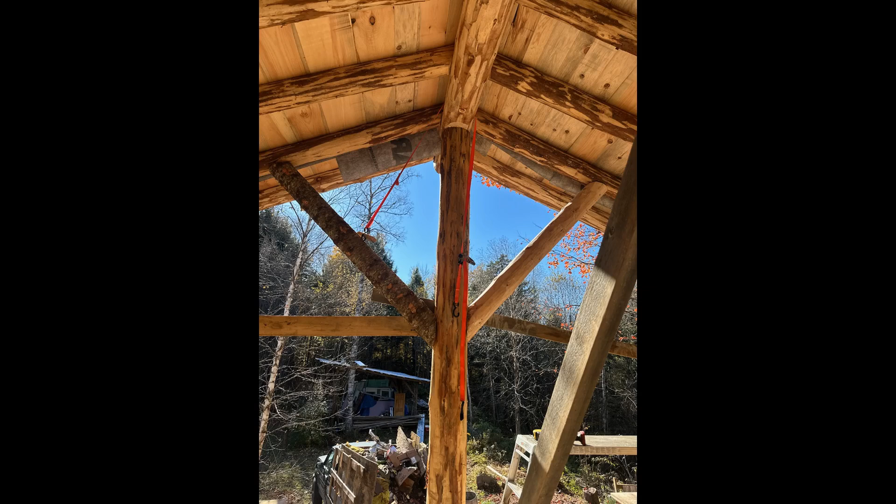This video is going to be about the hows and whys of Ford's cabin. The design, why we built it the way we built it, how we put the pieces together. Let's start with the design.

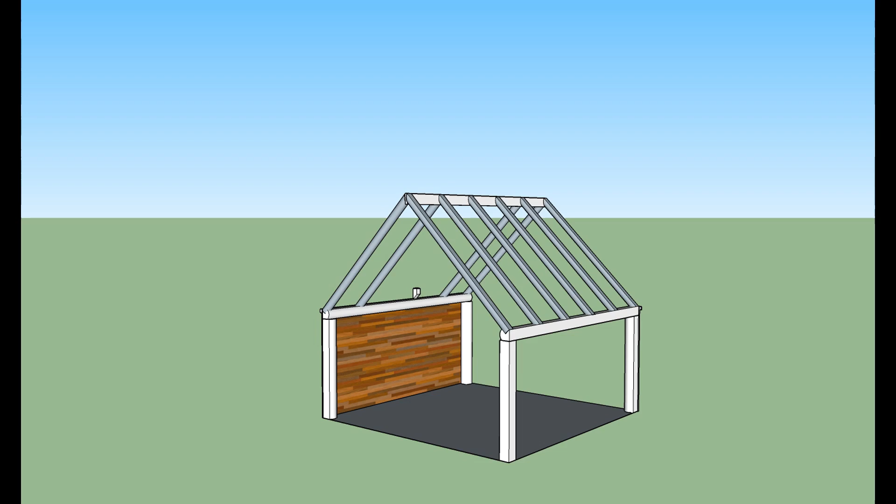The design was entirely Ford's. I suggested a bunch of more alternative, shall we say, hippie designs for him. Little portable cabins, things that combined like a workspace with a living space above it, stuff like that. And he wasn't having any of it. He knew what he wanted, and eventually he got it down on paper clear enough so that I could help him figure out how to actually build it.

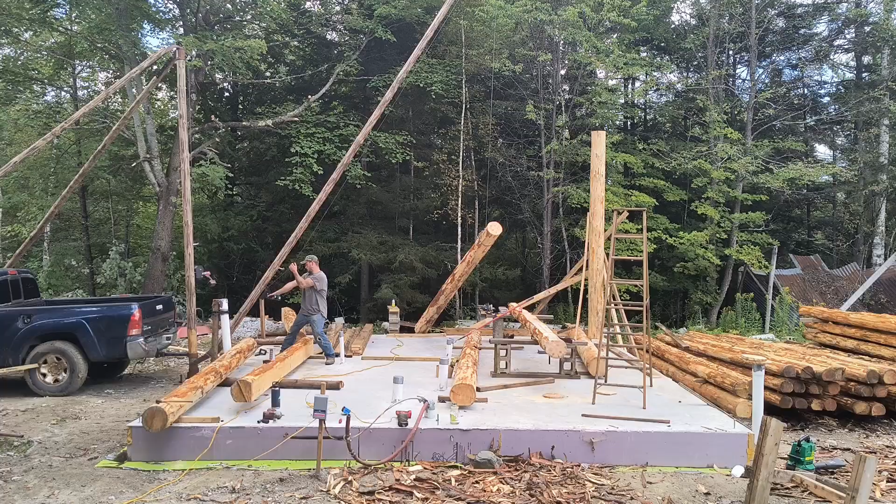So what he came up with, 20 by 24, kind of a story and a half, knee walls on the upstairs, and a structural ridge. And then I just figured out how to put that into an actual building. We were somewhat limited just by the sawmill.

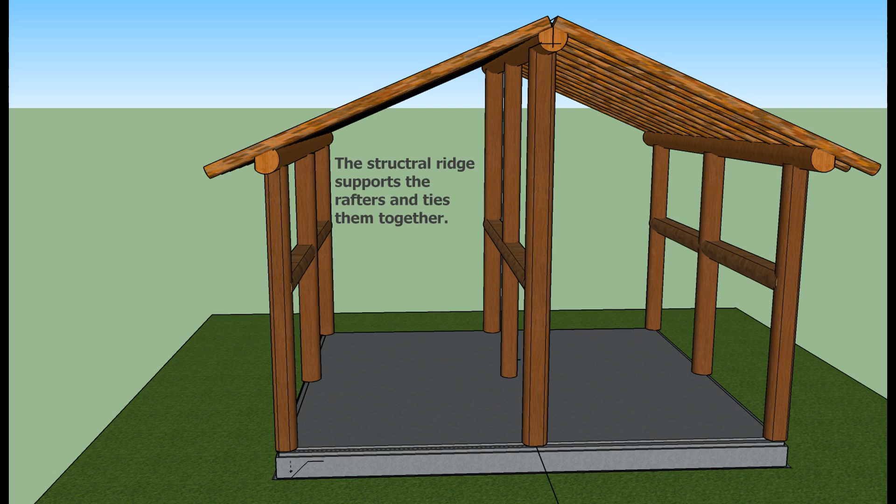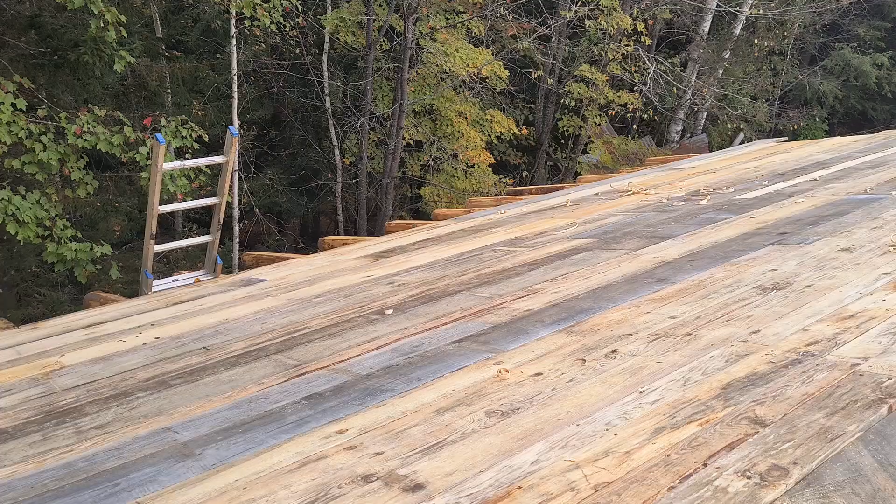When I realized he wanted knee walls and a ridge, so we'd have to have a structural ridge to carry the rafter load, and the sawmill can only cut 18 feet, so that kind of limited our ridge height there to 18 feet. So then we went down on the sidewalls to 13 feet, which gave us a 6/12 roof pitch, which is fine in this climate. A little flat maybe, but fine, and certainly a nice roof to walk on and work on.

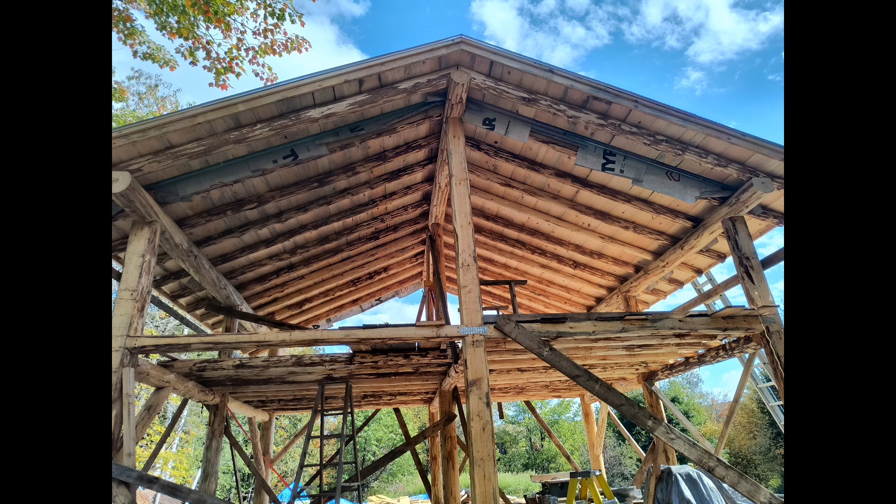And that gave him a knee wall upstairs of roughly 5 feet, which makes most of the upstairs pretty much completely usable. Actually, you can walk almost right to the eave in the upstairs. It's a very spacious feeling up there, and 10 feet tall at the peak.

There was a pre-existing dilapidated, mold-filled double wide trailer on that site. The previous owners had bought a trailer and then done a pretty good job of turning it into a double wide. The part that wasn't the trailer, they'd had a sonotube foundation, just 8-inch sonotubes, about 2 feet in the ground. They'd done a pretty nice job of building and integrating that addition onto the trailer.

Those sonotubes, even though they were only 2 feet in the ground, they were all still straight, and that really goes to the quality of the soils there. Very sandy, very well drained, and I think that the material is just good enough for the water to drain away. The site is also kind of on a little mound, basically slopes away from the house site in all directions, which is kind of perfect.

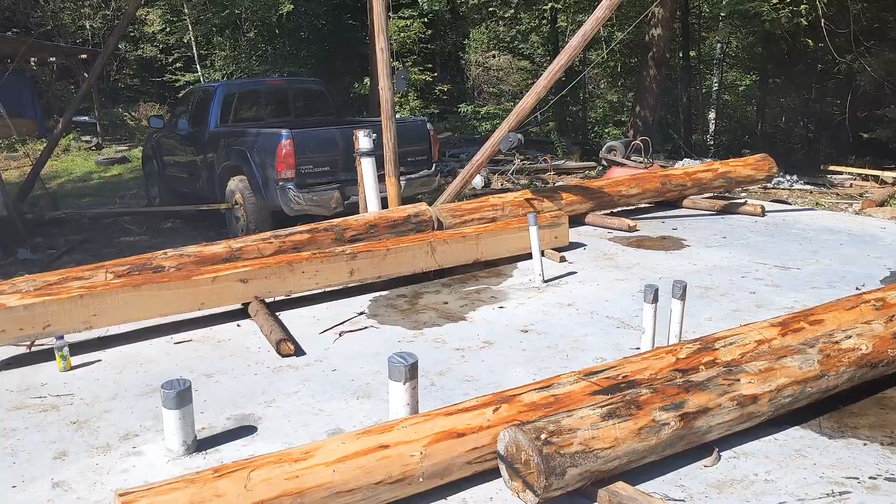So Ford's decision was that he wanted to put in a slab, put radiant heat in the slab, and build on that. And we started in that process, and went back and forth about how to do the slab. Eventually we calculated out the cost of just making a 12-inch thick slab all the way across versus the cost of making it 12 inches around the perimeter and thinning it down to maybe 6 in the middle. It was about an extra $1,000 of concrete, I think.

But when you figure that we would have had to spend $400 or $500, maybe even $600 on stone to fill in and raise up the middle of the slab, it just seemed to make sense to just do the whole thing in one thick chunk of concrete, which Ford put a ton of rebar into too, because he's a welder, and so he welded up a bunch of rebar cages. That slab's never going anywhere.

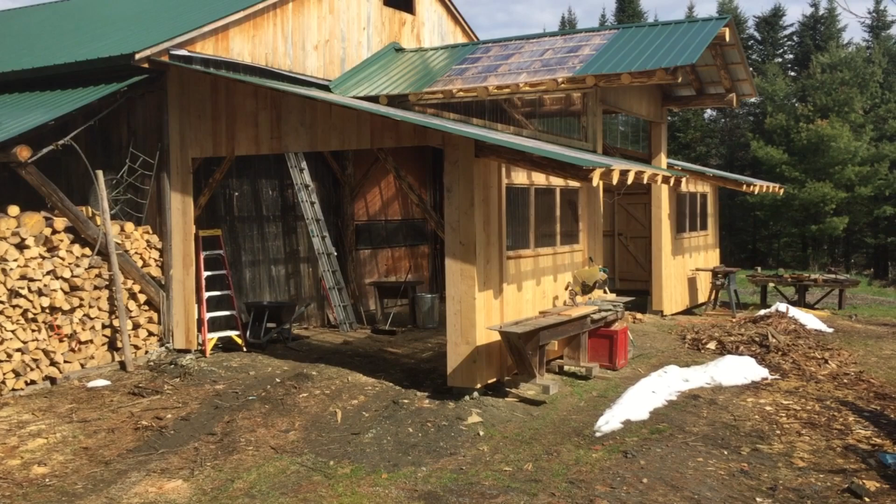The original motivation or inspiration for the way we built it, I think, came from the garage port, which is the structure we built on the back of our house 4 or 5 years ago. Ford and I did that. We framed that. We tried to do that cheaply and quickly, and we framed it out of logs. And it really looks nice inside.

When we built that structure, we hadn't gotten the sawmill working then. So we just used the logs straight up, round all the way around. Tried to use straight ones for the rafters. And the rafters on that building were 22 feet long. So quite long rafters with a nice long tail overhanging. And they're pretty straight, but you can see that the roof is anything but flat. It works, doesn't leak, and it was cheap and sort of quick.

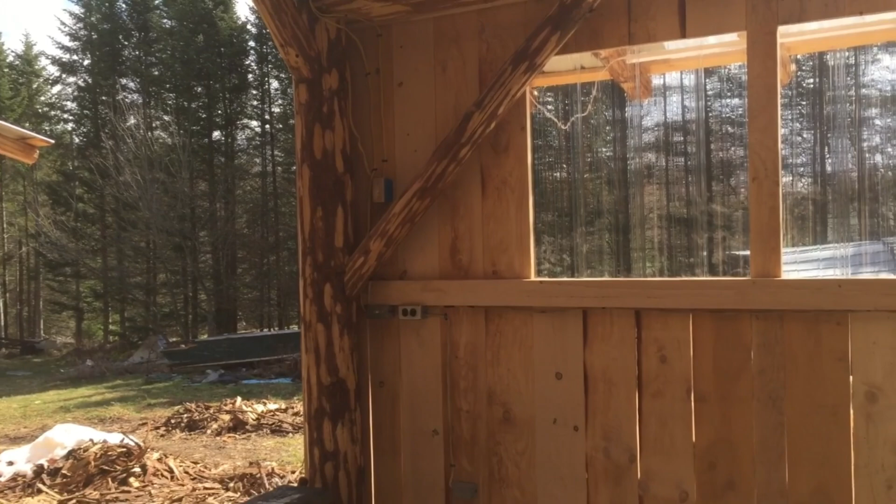But on this one, on Ford's cabin, because it was going to be a house and because we had gotten the sawmill operating, we decided to flatten one or two sides of each of the logs so we had a frame of reference, and also so we had a flat outside edge to work off of and to measure from. I was very impressed as we did that, running the mill down the one edge of the logs and taking off a little slab, and how little waste there was.

Previous to cutting up these logs for Ford's cabin, I'd cut up a small load of logs that had been laying around. And I'm not a great sawyer, and we're just learning to use that sawmill, but there's a lot of waste and a lot of slabs and just throw away. When we cut up the logs for Ford's cabin, we just took a thin little slab off of each side, very little waste, which meant that most of the logs we used were essentially cull logs. They were small trees, most of them barely big enough to make a couple 2x4s, maybe a 2x6 out of.

And I got to believe there's also some structural advantage to using wood in log form where the rings of the tree are all concentric, the way they grew, rather than laying in the wood however they are when you cut them into a piece of dimension lumber.

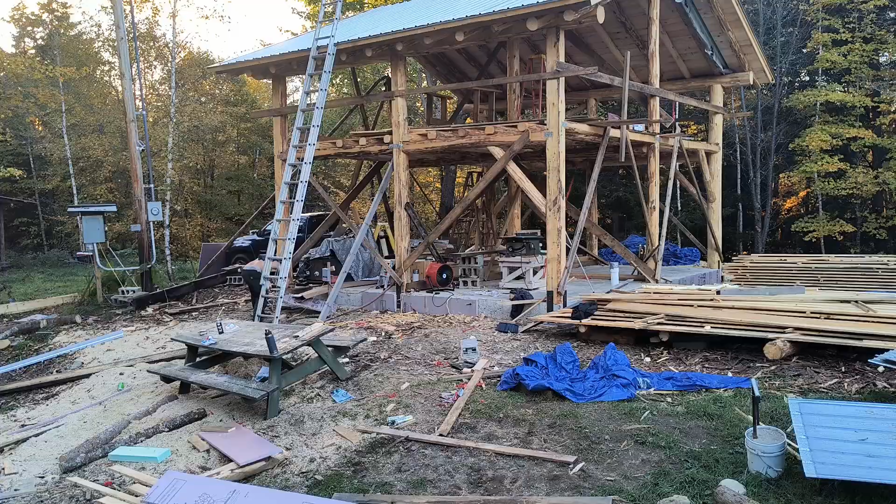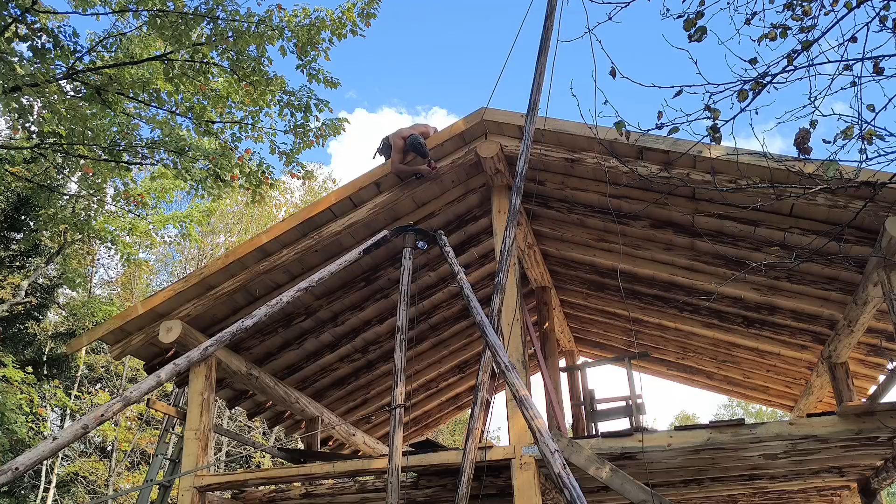The basic concept is to build a log frame, keep the whole structure inside the building with you. So you've got those natural materials, which always feel good, and just the aesthetic of the structure inside the building with you, instead of either concealed in the walls like in a typical stud frame, or sort of partially buried in the walls like it sometimes is in a timber frame.

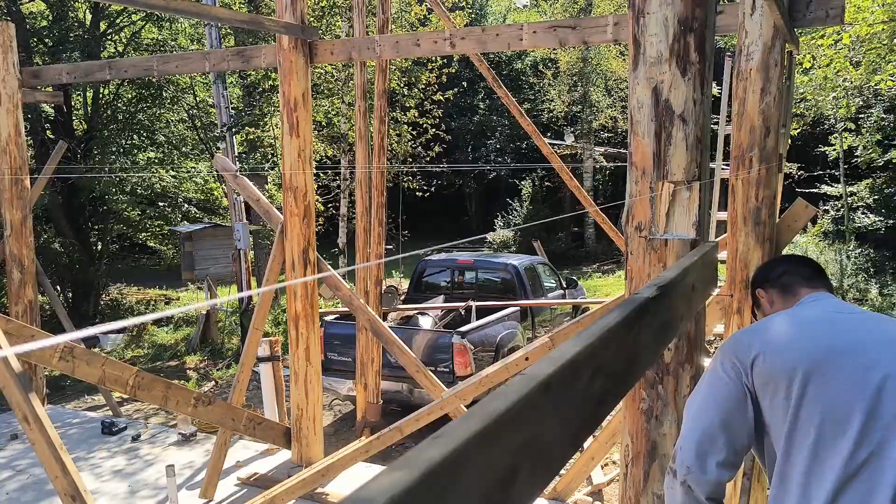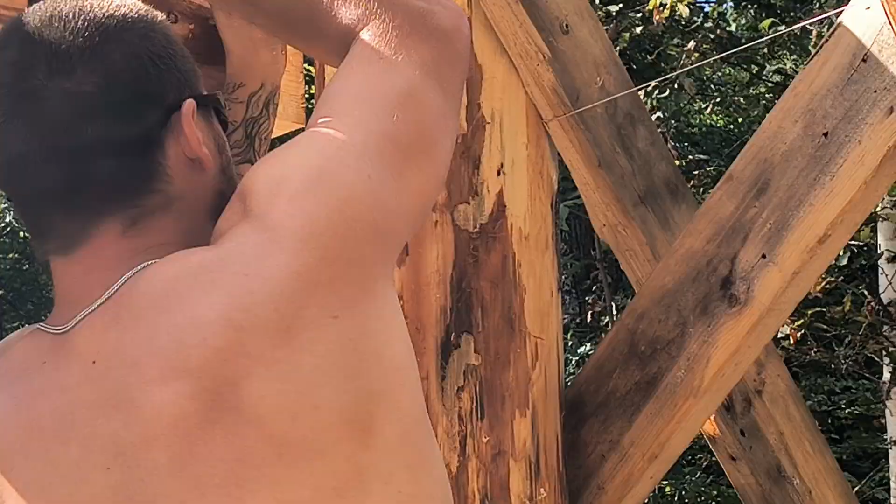For the joinery on this, even though we used a lot of hand tools and it kind of looks old-fashioned, it's really not. It's mortise and tenon joinery, but heavily modified. The concept here, again, is to do what works best. So we used mortise and tenon, which works really nicely for compression and really well for support, but generally in a typical mortise and tenon structure, terrible on tension. Any tension member is only held by the peg, and the peg just has to blow out the little bit of end grain between it and the end of the tenon, and then it's not really holding anything.

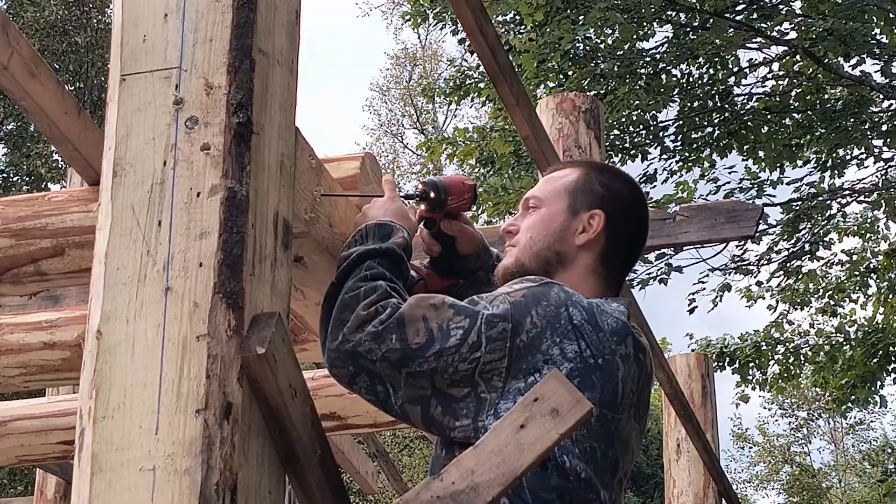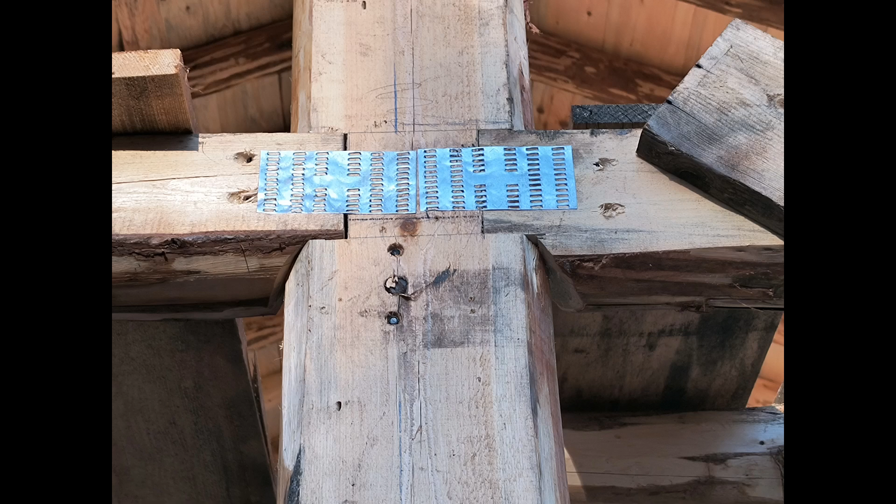So what we did were these short, stubby tenons, plenty to carry the load down, and then we secured them in place with timber locks or GRK screws. And on the critical ones, we also drove those big 3/4 inch pieces of rebar in. So there's no way for the tenon to come apart unless the screws fail or that slides off the rebar, which is pretty unlikely. And then on the outside, Ford doubled up some of them with some truss plates he'd bought. So really kind of a new old joinery, using mortise and tenon where it makes sense, and securing it, strengthening it with modern fasteners.

In the design of the building, there's also structure. For instance, the floor plates that carry the beams that carry the upstairs floor, those are let in from the outside of the post. You can see them here. And so they can't separate because of the truss plates and the screws and whatever, but they also can't separate because the floor joists, which are attached to the top of these beams, those are all holding them in place. And so there's no way for them to come apart or come out without breaking the grip of the floor joist above them.

And the same way, the outside floor joist is let in from the outside of the post, and the floorboards tie all those floor joists together. So in order for those floor joists to come apart, they would have to separate themselves somehow from the cross tying of the floorboards.

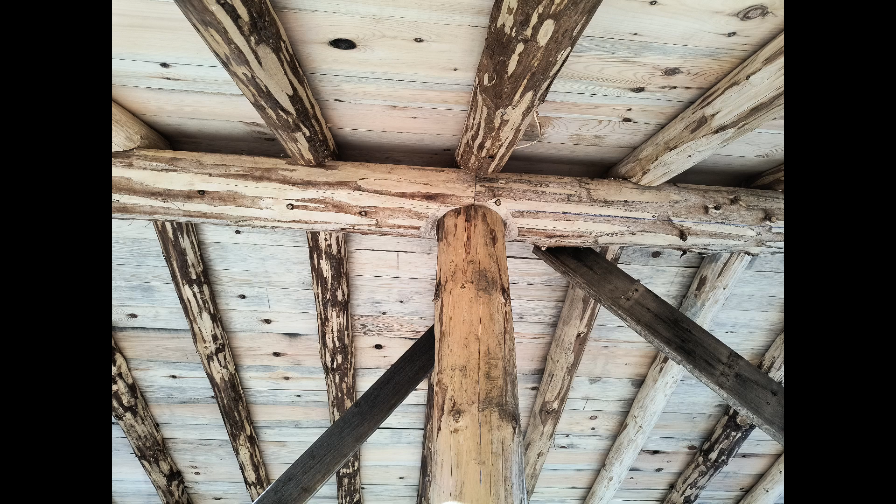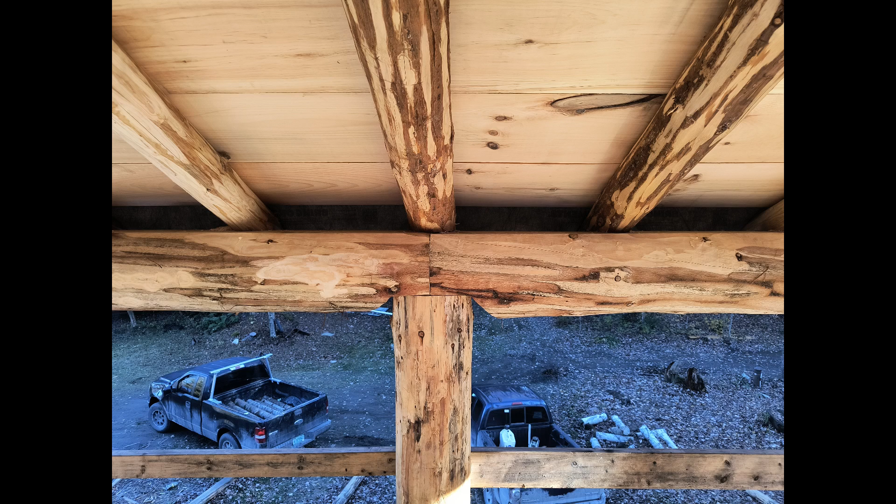It's also true on the rafter plates upstairs. The building's 20 feet wide along the gable end, and then we put a 2-foot overhang on each end, so a 24-foot ridge plate. So we did that in two 12-foot sections. So there's a joint in the middle. Obviously, anywhere there's a joint, that's a weak spot.

But in order for that plate to ever separate, the rafters, which are screwed into each plate and are sheathed together, would have to somehow separate. So there's not really any way for that joint to come apart either. There's some other peculiarities about this design, partly because we're figuring it out as we go along.

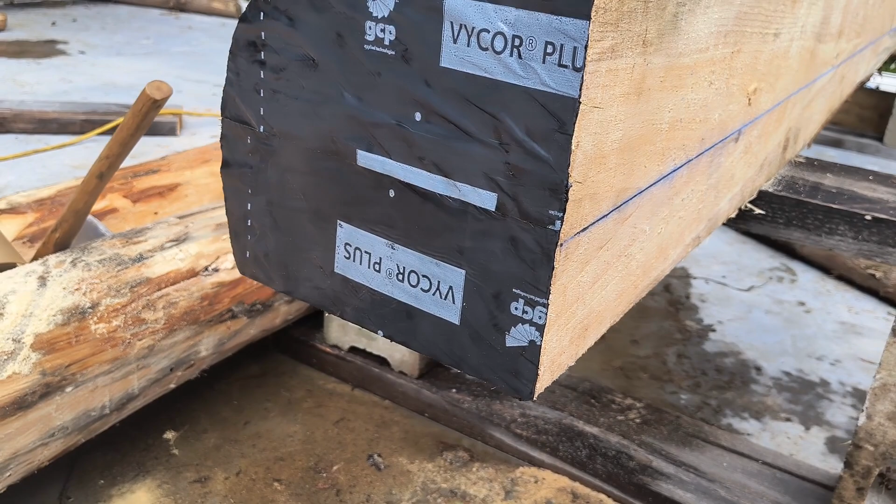You see that we put vapor barriers on the post bottoms so that the posts can't wick up any water from the concrete. I don't know how much of an issue this really is, because under the slab is a Stego radon barrier, moisture barrier, a thick, I can't remember how many mils, but thick piece of plastic. So maybe that's not even a problem.

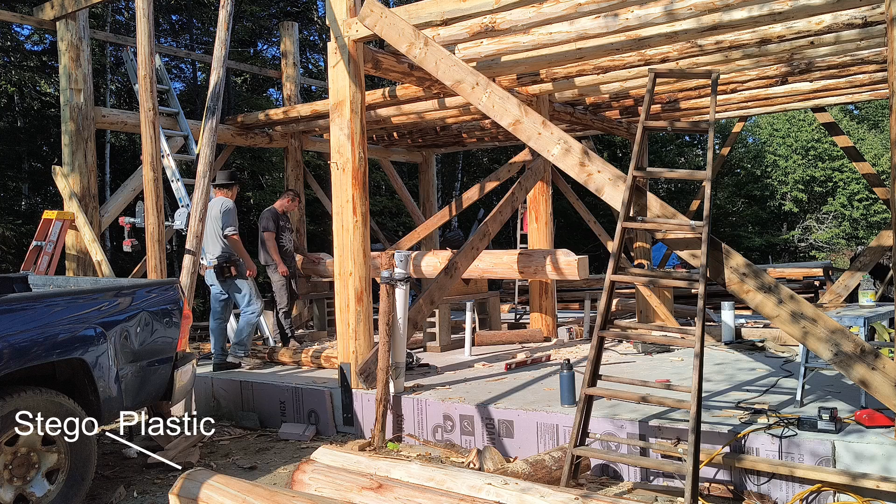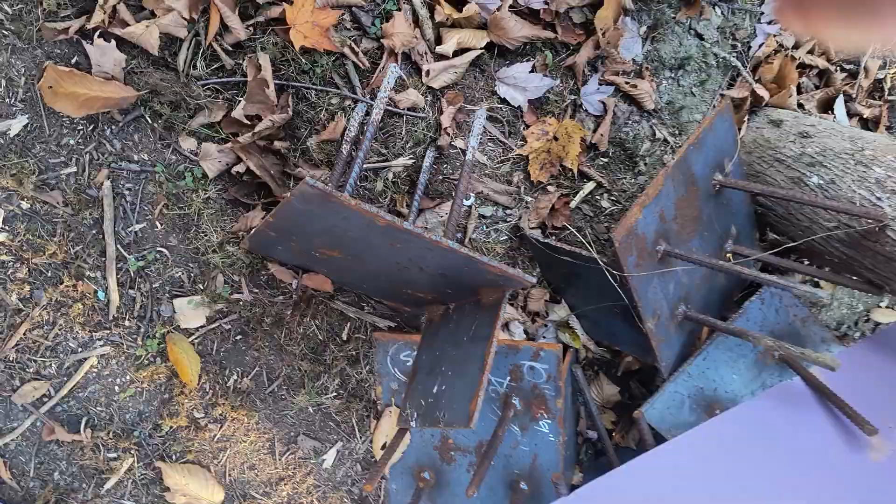There aren't any plates. Ford didn't want to have any pressure treated wood internal in the house. So there are no plates on top of the concrete. And this did give us some struggles. Ford had built, or welded up, some little chairs that we were going to set into the concrete and use to secure the posts to the concrete. And we just delayed too long, and the concrete got too hard, and we couldn't put those in.

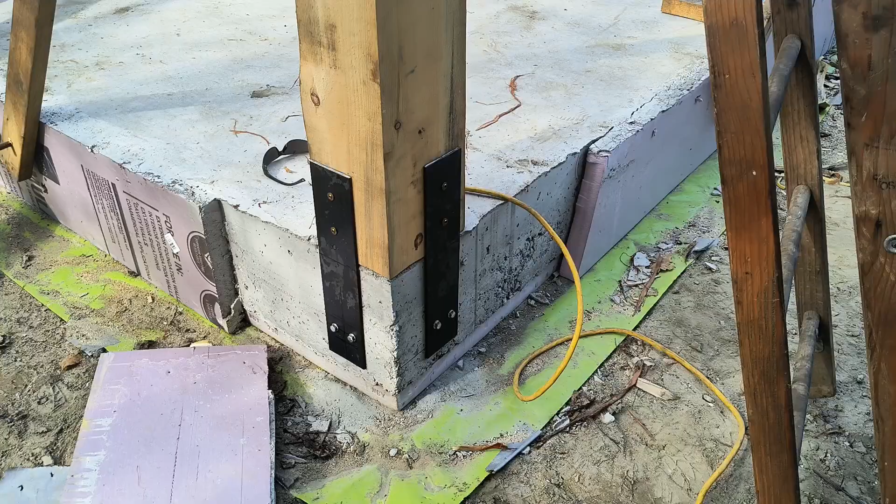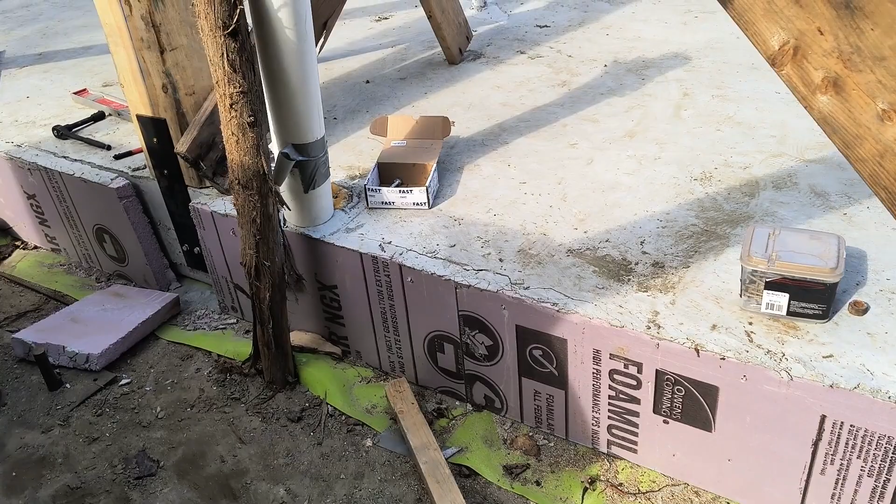So instead, he made some flat stock with some holes in it. And we drilled those into the concrete below the level of the PEX radiant tubing, and then screwed the posts into that, which actually worked really well. But there's still no plate on the slab, so securing to the slab is difficult.

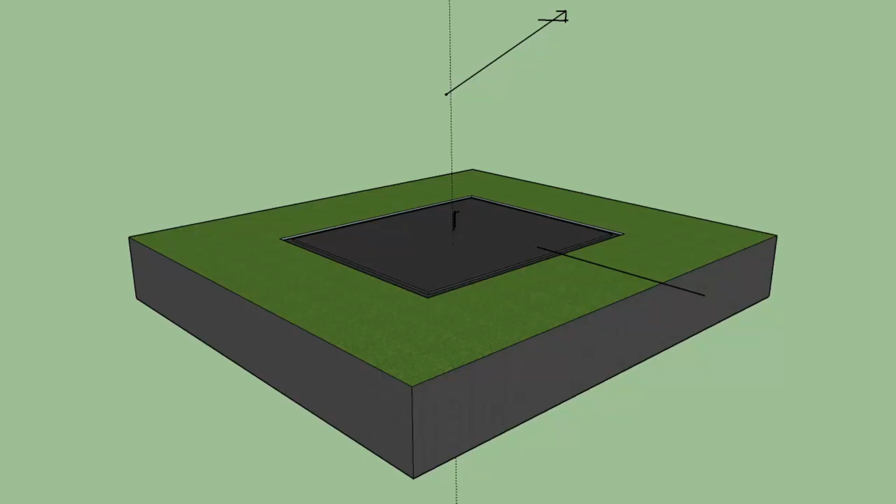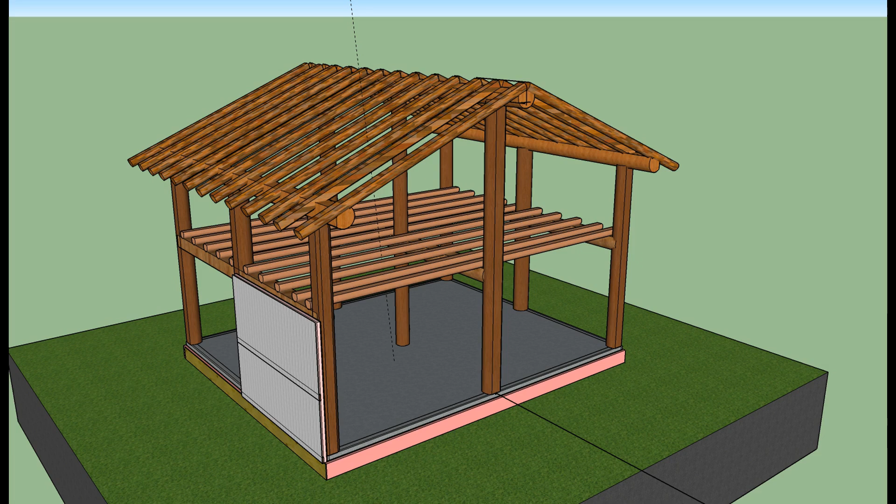And I should go back and mention that it's also important that the slab is thick like that, 12 inches, because all the load from this building comes down in the 9 points where the posts rest on the slab. There's no distributing the load all along the wall of the slab on a plate. It all comes down on the 9 points of the posts. So the rebar and the thick slab's probably a good idea for that reason.

One thing that I've been working on in this building is the perfect walls concept, which, as near as I understand it, and if I can simply explain it, is to have the building completely encased in insulation instead of putting the insulation between the structural members like you would in a typical stud frame building. So you want a complete wrap of the building with insulation, no thermal bridging by the structural members.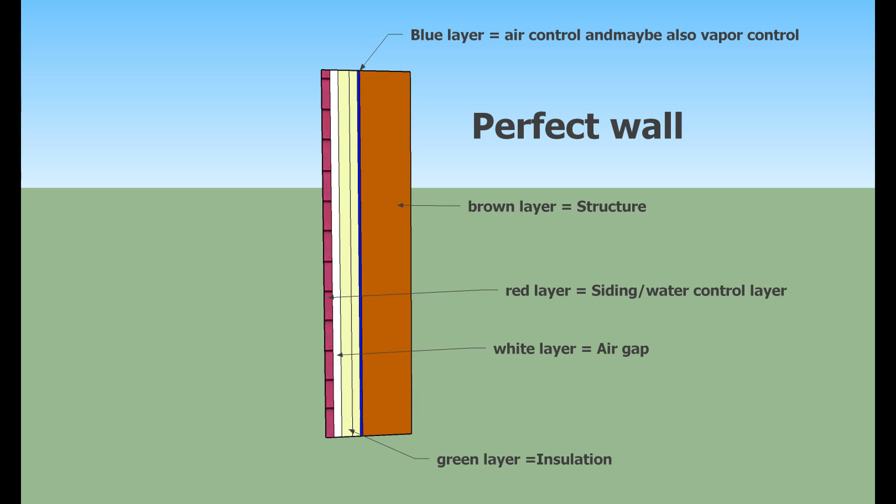And you want an airtight building, and behind the siding you want some sort of gap so that any rain that manages to get driven through the siding isn't trapped between the siding and the sheathing, but has a plane that it can evaporate out of. And similarly on the roof, we made a gap so that any moisture that gets driven through the roof, or even condensation on the roof, has a means to escape.

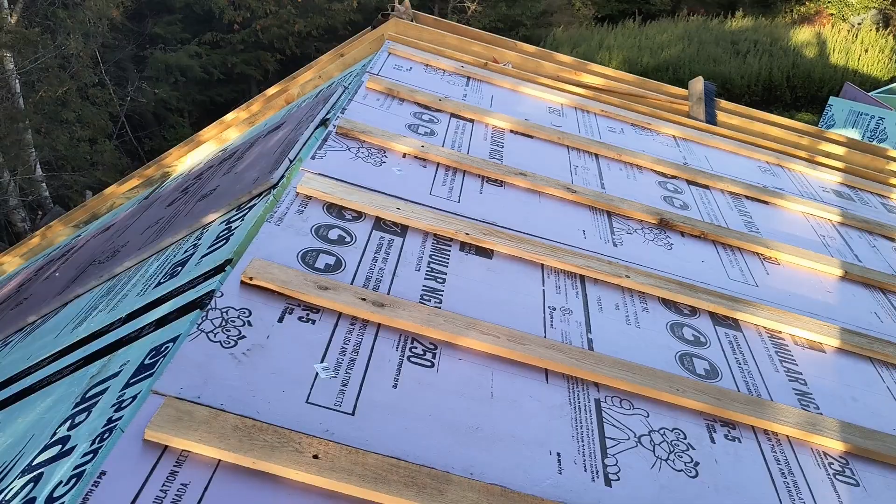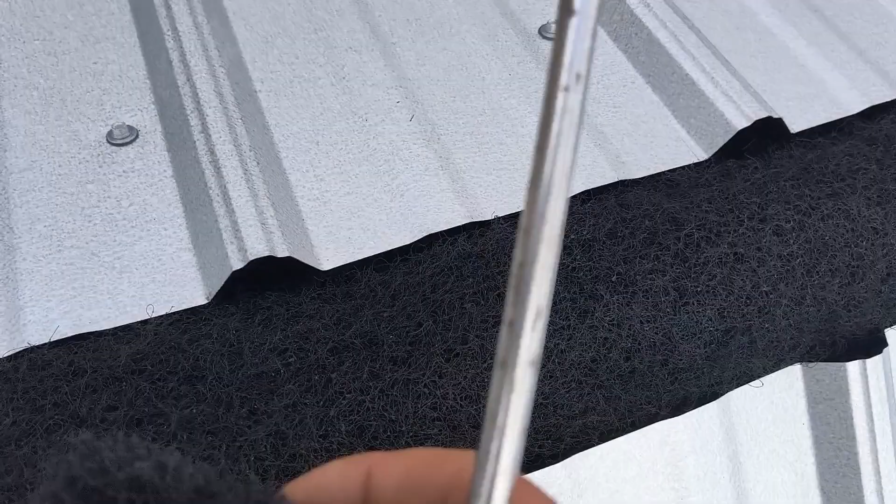But this perfect walls concept is a complete wrap of insulation with no thermal bridging, and a rain screen so that the water can't get in and start rotting the building. It's really a fairly simple concept, but it's sometimes difficult to figure out how to integrate it into the building.

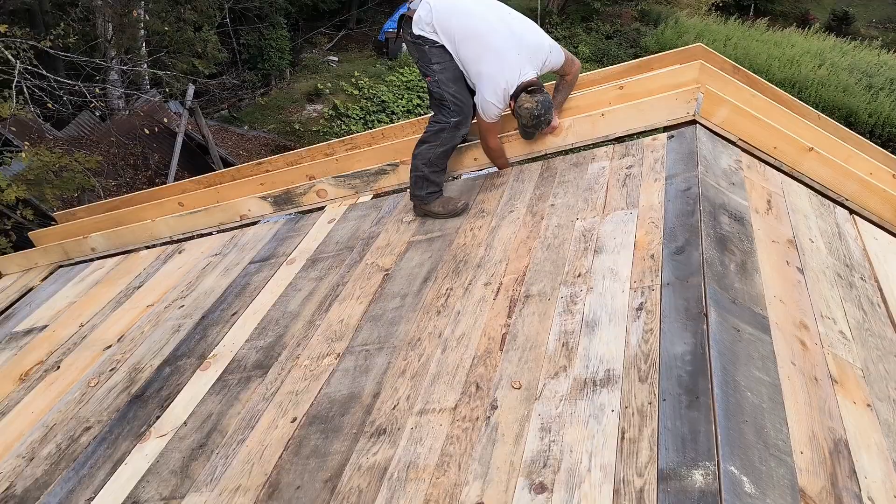For instance, we sheathe the roof, and then we put a layer of foam on the roof, but that foam has to make a connection with the foam that comes up the walls, and that's why we cut these gaps through the sheathing so that we could bring that foam up in one integral wrap around the building with no gaps. I think there are two reasons for this.

Obviously, the first is the problem of thermal bridging, where often you look at a roof on a frosty morning and you can see frost on the roof, but not in the places where the rafters are, because the heat from the house has come across those rafters and melted the frost right in those places where the rafters are. That shouldn't be a problem in this building.

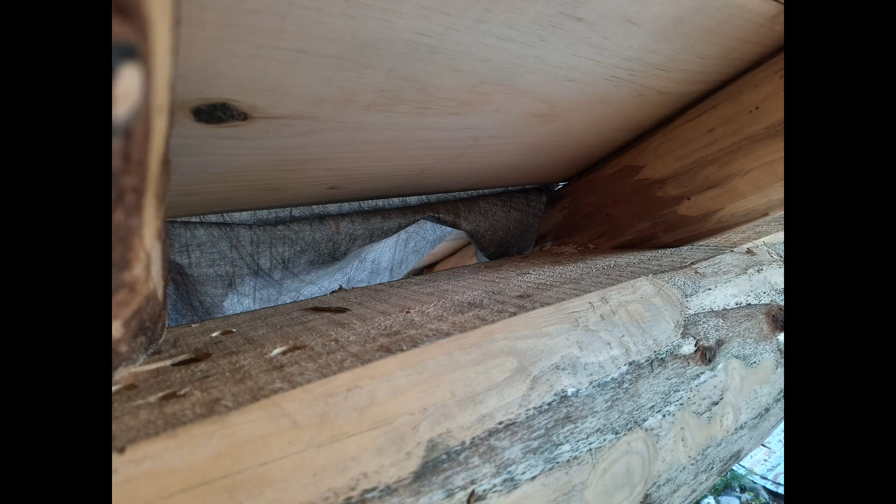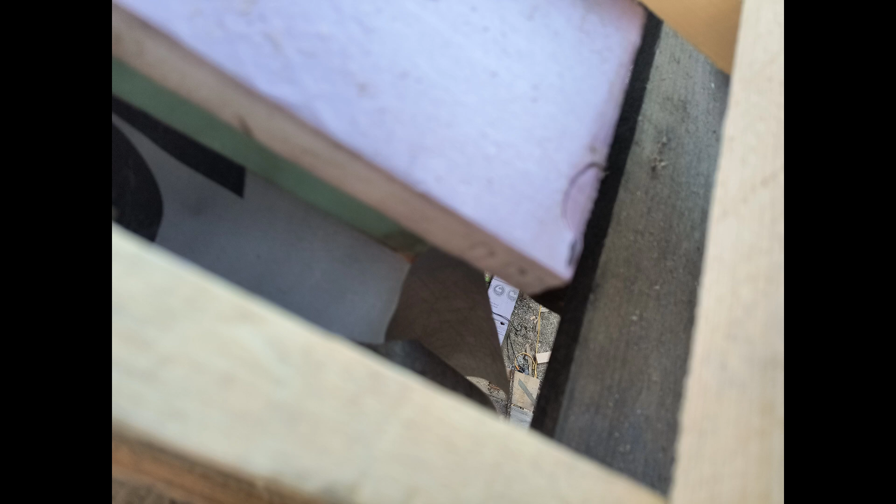Got that thick layer of foam, and then we sheathed on top of it, and then we put the grid of strapping on top of that so that there's room for air movement right under the roofing material to dry out any moisture that makes it in there. But it did make this problem where we had to cut this gap in the sheathing so we could bring the insulation package from the roof around the wall without any breaks.

The only place we violated this concept is on the rafter tails and the rafter plates, where they protrude from the building. And the reason for doing this is just because it looks nice. And we figured we can seal those areas with spray foam. But that's the other reason, I think, for the perfect walls concept.

Anywhere you have your structural members protruding through the insulation layer, that's an obvious location for shrinkage or cracking of the foam, or some sort of failure that causes a gap that air can travel through. And once you have air traveling through there, you've got moisture in the air from the house. And when that moisture hits the cold air outside, certain times in the year, you're going to have condensation, and then you're going to get rot.

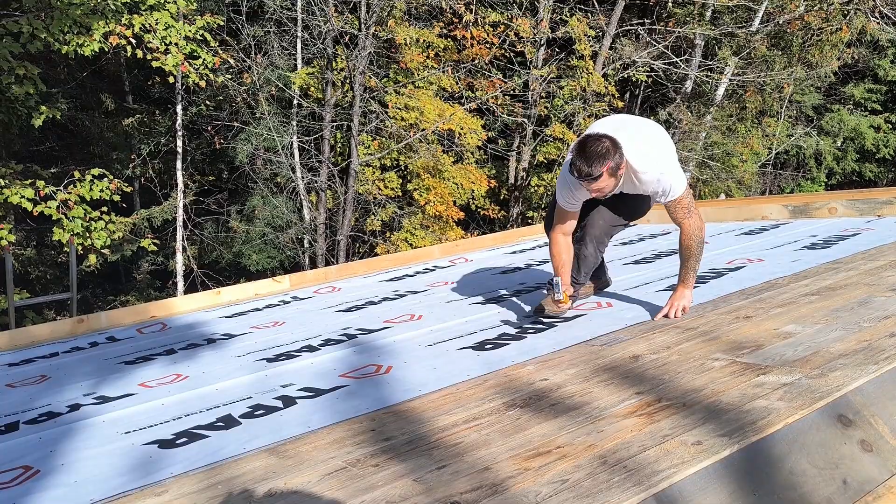We were confused a little bit about vapor barriers, vapor retarders, which, as far as I can tell from hours of watching YouTube videos, is a subject that still confuses a lot of people. The rigid foam we're using is a vapor barrier. So theoretically, if the foam is continuous and well sealed, and we're using 2 layers of foam so that the joints will all be taped but also overlapped, there shouldn't be a vapor barrier needed. The foam itself will be the vapor barrier.

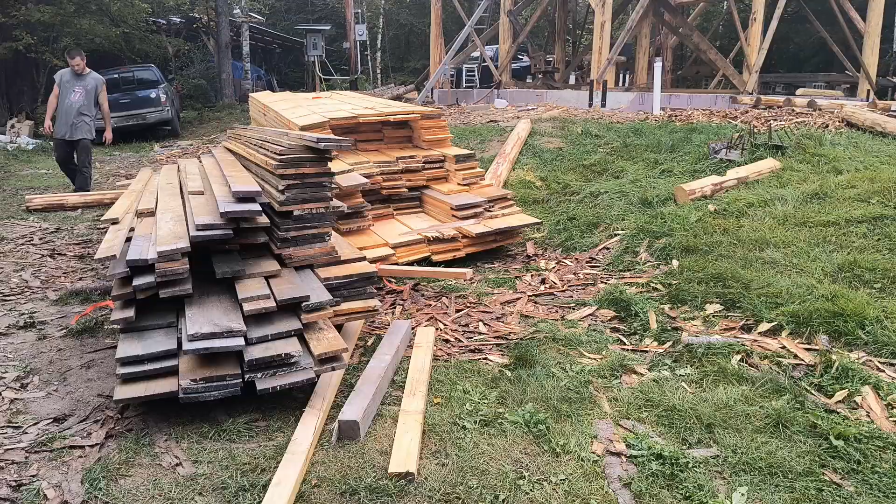However, we did want to put some Typar on the roof, and no, Typar is not meant to be used in a horizontal application like that. But here's the reason. Ford got some wood, rough cut pine, got a good price on a bunch of it, pretty dry, but it wasn't shiplapped and it was just rough, all 4 edges. We used that to sheathe the roof. Ford ran one edge through a little planer, cleaned it up, and it looked nice.

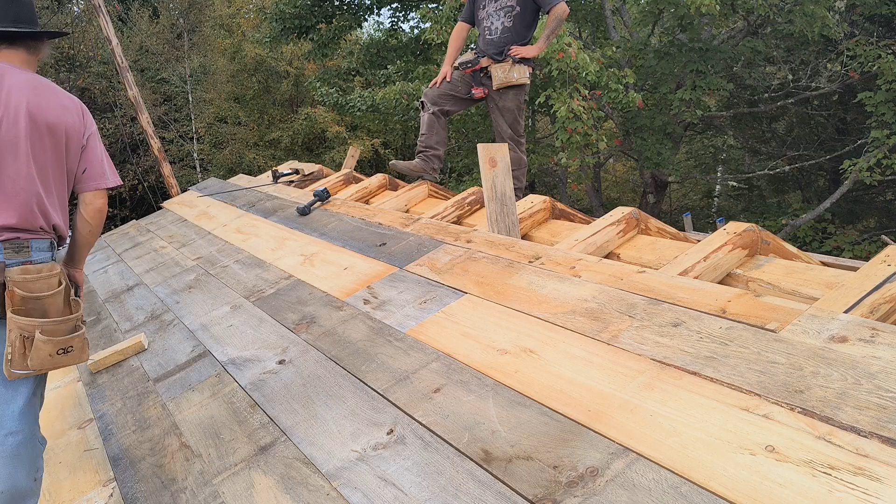And we jacked it together to try to get the gaps as tight as we could, but it's inevitably going to shrink up a bit and gap. And when it does, you're going to be looking through those gaps at the foam. And so we wanted some dark membrane in there so it looks at least just like a dark crack, not like a pink piece of rigid foam.

And we thought about different things. Tar paper was the obvious thing. Ford didn't necessarily want that inside the house environment. We thought about just taping them with masking tape. But in the end, we used the Typar, which is quite permeable, but is an air barrier.

So the hope is that even if we end up with a leak of air potentially around some of the rafter tails or something, we will have been able to fold this Typar into that location neatly enough to stop that air from traveling through there. We'll see. It's a bit of an experiment.

We also did not put any sheetrock between the foam and the wood. I have mixed feelings about that. We were rushing to get the roof on. It's an additional expense, but it is a fire barrier, and foam is toxic when it burns. So in the event of a house fire, just got to get out. The wood, 1 inch of wood, is also, I think, a 30-minute fire barrier or something like that. But that's a design thing I think I would revisit in the future and maybe do differently.